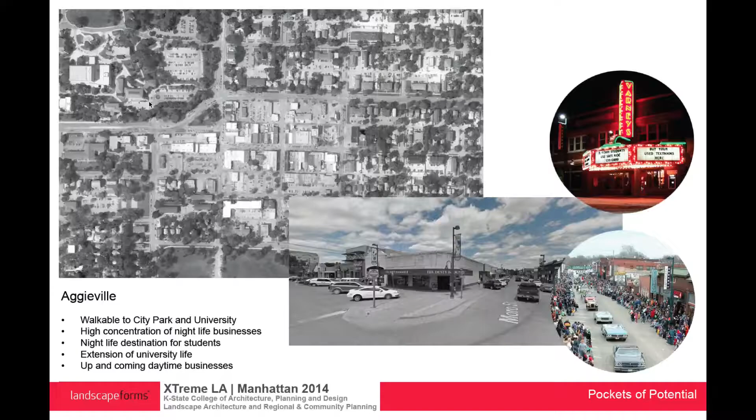So the next is Aggieville. It's a really, really walkable place. It's very close to the university. It has a high concentration of nightlife businesses, but we've also been making a move to make it more of a family-friendly environment. A couple weeks ago we had the Aggieville 125th celebrations, saw tons of families out there, and it was just a really great way to see the space activated, not just at night.

Like we said, there's a lot of up-and-coming daytime businesses. Varsity Donuts is a staple, of course, and Acme is wonderful for all sorts of things.

City Park. This is a huge amenity that I don't think we really capitalize on. It's 40 acres, and there's not too many other cities that have that big of a spot really close to downtown. And it's a very big connection point between what's happening down in Aggieville and what's happening on Poyntz. Perception-wise, they seem like they're really far away, but you can get from Aggieville to Poyntz in less than a mile. It's actually really quick.

So there's a varied use of recreation down there. You have the pool, the spray ground, the rose garden, a lot of things that are working really well, and then there's also some opportunities to improve those things. Right now it kind of has a low-profile, nondescript park edge. We really think that this is such a good amenity, and we'd like to see it programmed a little stronger.

And last, we're going to be talking about the gateway. So the entrance to the city coming off of 70 and then on to 177. Right now, when you're coming up that way, you hit the back edge of the mall and a big expansive parking lot, and that's really a big front for our city.

So there's a lot of things we could do with that. It really can bring in some gaps between making this a walkable downtown Manhattan center. Right now we kind of divert going down Poyntz, we go down Pierre, make the little circle drive, and then out onto Tuttle Creek. But it has really a lot of opportunity to give some character for that first perception that people are having of our town.

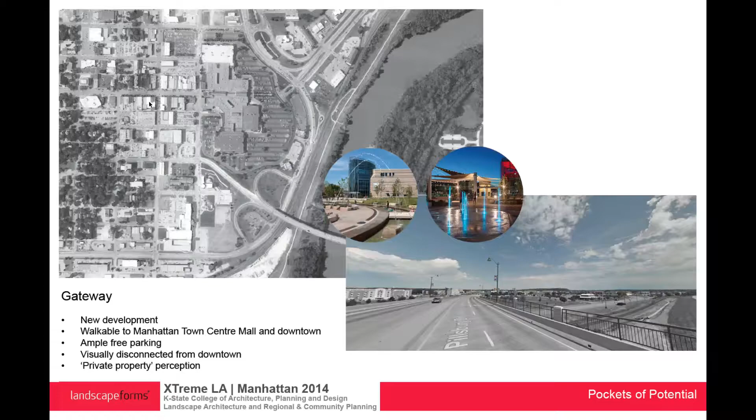The big box. We love it. We love to hate it. What we've seen is that there's an increasing vacancy. It is vehicle-oriented, it's difficult to access without a car, and it's low density and expansive.

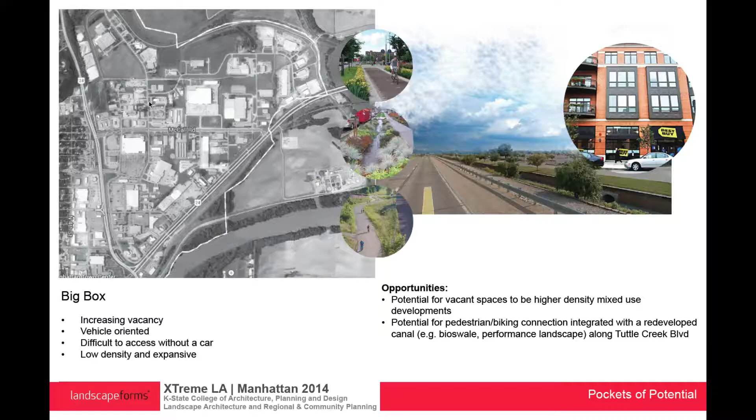Its potential is to imagine the vacant spaces as mixed-use development, to integrate it with your big box stores, but to also have residential, small businesses, big businesses, and also to integrate biking and pedestrian connections so that it is more accessible, and also integrated with sustainable landscape interventions to mitigate or help with stormwater management in this area.

The stadium, it is impressive. It has expansive surface events parking. It's an icon for Manhattanites. It's adjacent to the hospital, research facility, and university-owned apartments.

One of the opportunities that could be explored is the potential for additional uses during off-peak hours, such as a farmers market, or thinking of using sustainable materials to help with stormwater management in terms of the surfacing of the parking lots, such as permeable pavers, integrated bioswales, or reinforced turf.

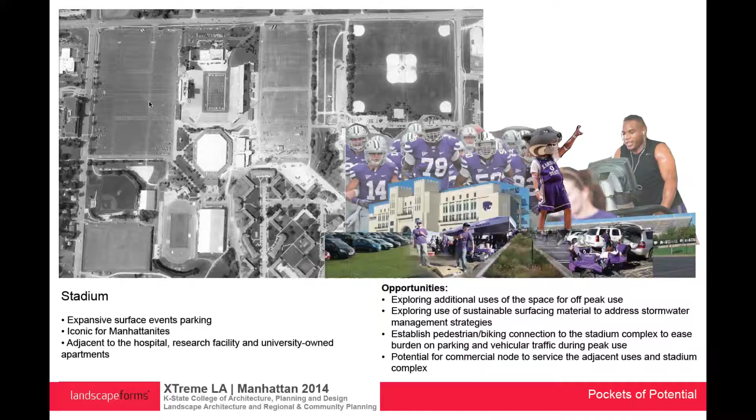Lastly, the research facility. It is a new development. It's projected future growth for Manhattan. It is a center for innovation, and think big, basically, is what we see it as.

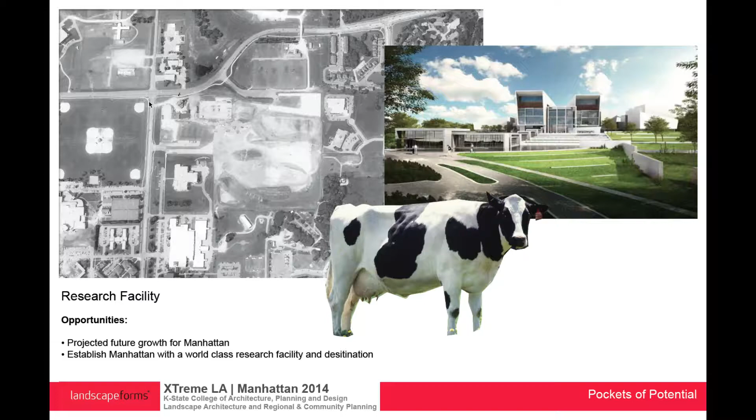And I'm going to introduce the next presenter, Cody, who will talk about connections and transportation.

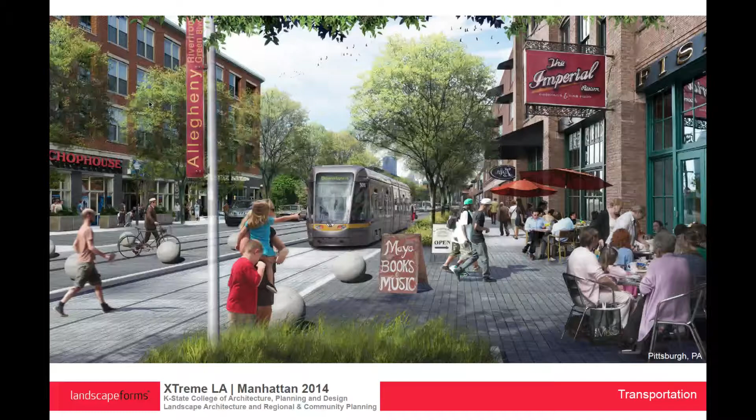The components of a street are actually pretty significant, and they're actually pretty, like the small details. One of the most important things is actually appropriately scaled architecture to the right-of-way width. So we want narrow travel lanes. We want transparency on our architectural storefronts.

We want people, bikes, and cars to be able to use that corridor equally. And we want a really wide sidewalk typically. We want 18 feet at a bare minimum. And it needs to support dining, walking, and furnishing, as well as the mentioned stormwater planters as well.

So the concepts that we're going to show you actually have been in place for a very long time, and they're still in place today, and they're still happening in cities all over the United States.

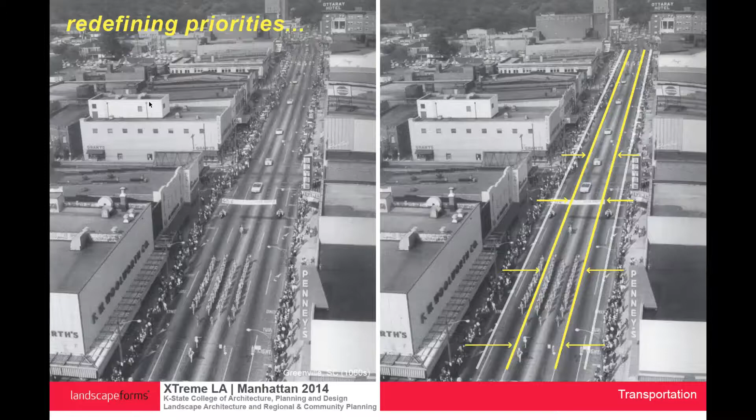Just to show you a couple of examples, this is Greenville, South Carolina, a very small town. In the 1960s, they actually decided to redefine the way that they were treating the street. They took a 6-lane road through their main street, road dieted it to 2 lanes, on-street parking, and street trees, and this was done by Lawrence Halprin in the late 60s, installed in the early 70s.

So as we jump into the specific streets, we did read through the 2035 Manhattan Transportation Plan. And what we pulled out of that is definitely that there's tons of opportunities and that things need to happen. And that's what we really want to focus on. It didn't really get into too much detail other than the fact that it needs to be multimodal and it needs to be a shared space, which we'll get to.

So what we're going to go with now is a series of diagrams to show the analysis that we went through in looking at the city. The first is really an exercise looking at proximity within the city of Manhattan.

The myriad of circles you see on the screen represent different walking distances within the city. The smaller red ones are a quarter mile, which is really just a 5-minute walk for the normal person. From there we have a larger half-mile ring, which would be 10 minutes, as well as up to a mile, which would be really a 20-minute walk.

You can see the majority of the metropolitan area of Manhattan is really within that 1-mile radius, which would be not much more than a half-hour to 45-minute walk from one side to the other, which, in the grand scheme of things, is not that large.

Also, behind this image you can see we have City Park called out in green, as well as some of the major arterial streets shown in white that are labeled. The other important factor we wanted to call out as we're looking at transportation is the linear trail and how it covers the southern expanse of the city, but really doesn't lead to or from any specific location.

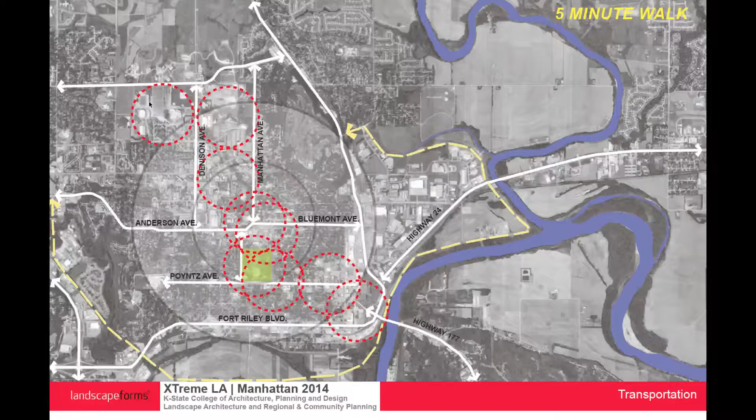This is hearkening back to the group before us looking at what they called pockets of possibility. We like that, so keep those in mind as we show you these connections we're looking at, and see how the proposition of these additional connections can really tie these things together, as right now they're slightly disjointed.

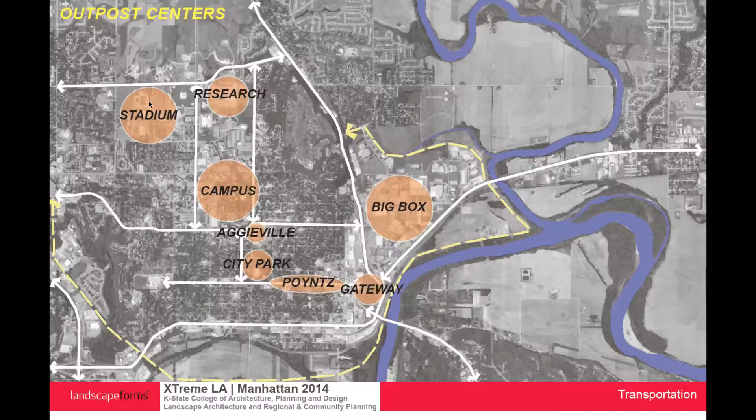These are the big entrances into the city. These are important, obviously, because they're bringing everyone here. They're bringing all of the people here, but they're also bringing the traffic here. The idea is really to look at how do we handle that volume, but also how do we celebrate that entrance. All of these are important places to see the city from, and how can we really address that.

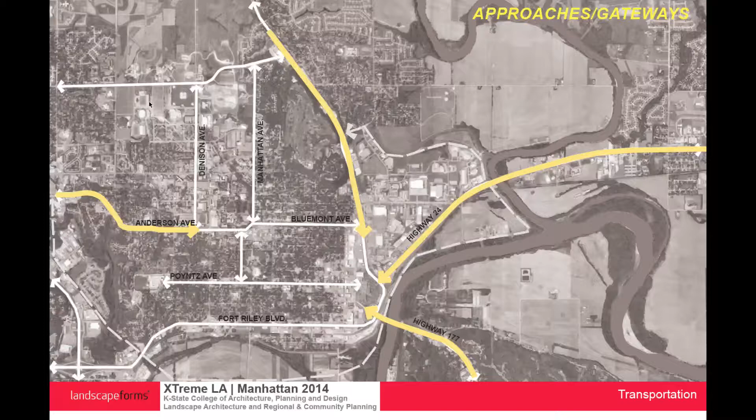And then we get to what we saw as the barriers. Some of these are physical barriers, obviously crossing the river when you're coming in on 177. You have the levee wall, you have the train tracks, you're kind of landing. There's a lot of circulation you have to go through to get really anywhere in the city.

That's a physical barrier, but there's also quite a few perceived barriers. Looking all around the K-State campus, Manhattan and Denison really don't have a huge pedestrian volume that they can accommodate. A lot of streets dead end into those streets, and they don't have a lot of bicycle occupancy because they don't have the amenities to account for that.

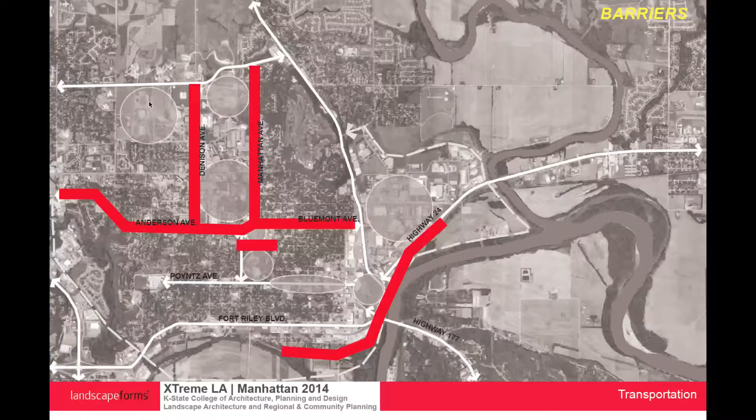Also, of course, Bluemont and Anderson, a huge arterial street right through the middle of town, not too fun to cross, as we found out this week. The other small one that I think is very important is this perceived barrier between Aggieville and City Park, which I think Rachel touched on. They're really not that far away, but it feels like they're a completely different area.

So we're going to apply some of the images and concepts we've talked about so far to some of your existing conditions. These are by no means prescriptive. You don't have to build it this way, but this is just a reimagining of some of the sites we saw this week.

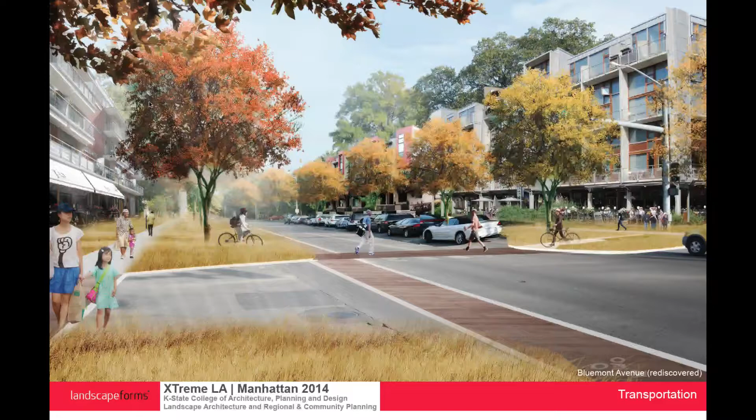So this is Bluemont Avenue, obviously that huge arterial through downtown. It's 4 lanes, there's no parking on either side, it's pretty intimidating to cross. So looking ahead, this is something that it could be. You can see we're narrowing traffic lanes, we're allowing for parking, but we're expanding sidewalks to allow for cafes or other street uses to expand out onto the right-of-way.

We're incorporating tall grass prairie species that can really convey the meaning of Manhattan and why we're here, and the beauty of this, but also potentially handle stormwater needs as well.

Looking at the connections, we'd love to look at every single street in the town, but where we really saw the largest importance were these larger bold arrows in green here, the same streets that we showed as barriers before, bounding the University, Bluemont and Anderson.

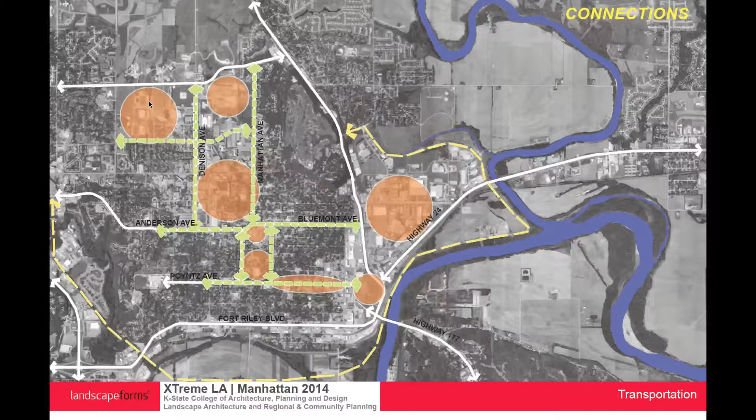Now, we know that a bus line was something that was looked through in the recent past, but just as outsiders coming into the city and seeing how people get to one place from another, and having in-depth conversations with students about getting to the stadium on game day and the struggles with that, especially with driving, we did see a really simple loop that remarkably falls on the same loop we took on our tour, because it seems to hit a lot of the high points in the city.

And it goes down all of the major avenues where almost all of the commerce is, and it's hitting all of those shopping centers, all of those parks, and all of the places that people want to go, and it's a very simple loop system.

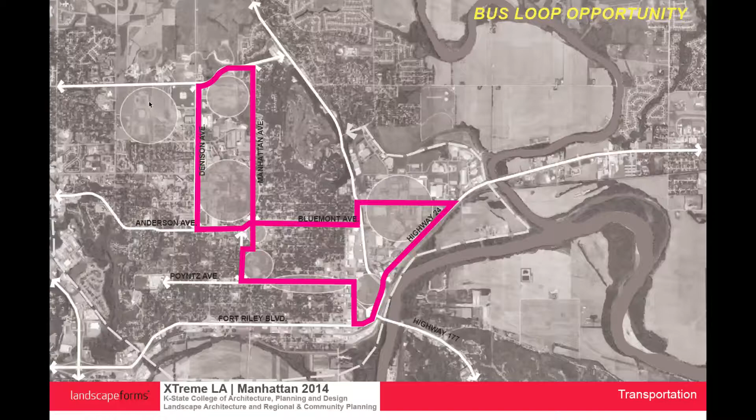And then looking at recreation, obviously not everyone wants to ride a bike on a street, not everyone wants to walk down a sidewalk, but you have a great system in place with the linear trail. But how can that extend up to the north side and really make a comprehensive loop through the city? And then how can we have spurs off of that trail that lead you into key points within the city and connect you to those street systems that are addressing bicycles as well?

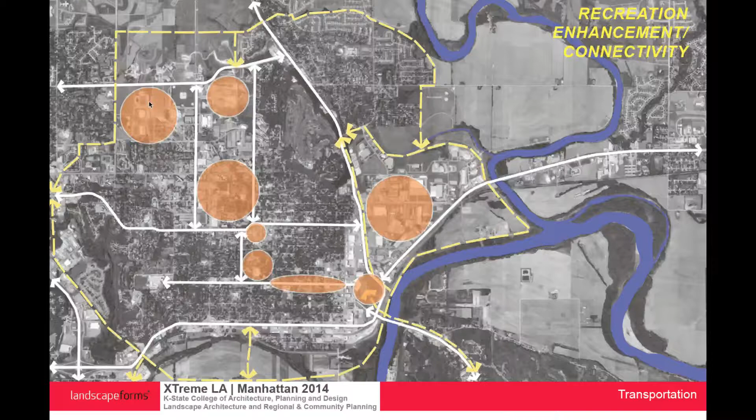And so what we really want you guys to understand, that we've come to understand, is that this has been a 24-hour process. This is by no means comprehensive. This is by no means all-inclusive of what Manhattan is facing for the future and what needs to happen. But we do want to leave you with some recommendations.

One of those recommendations, first and foremost, is that we think we need to take an inventory of all the streets in town. We need to develop a comprehensive master plan, which we can bring in experts in walkability, experts in bicycle infrastructure, and experts from all over the country that can take a look at our streets at a different level and from a different light than we understand them now, to really understand how they can become more multimodal, how they can convey the stormwater and all these different things that we've talked about.

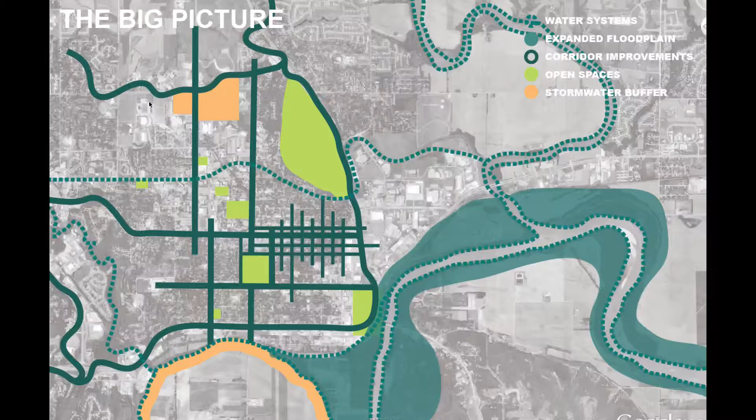Can you do an overlay on the next one? So how these overlay with our key areas: the campus, Aggieville, downtown, the hotel district, and also very important is the river. So integrating these principles into existing open spaces, such as City Park, but also developing new key open spaces that Aubrey will talk about, prioritizing main streets for streetscape improvements. We saw quite a bit of this with the transportation group's images, and you'll see more with us, supporting public and private projects, and also buffering the river, making that not just a place that is more environmentally valuable, but also valuable for people.

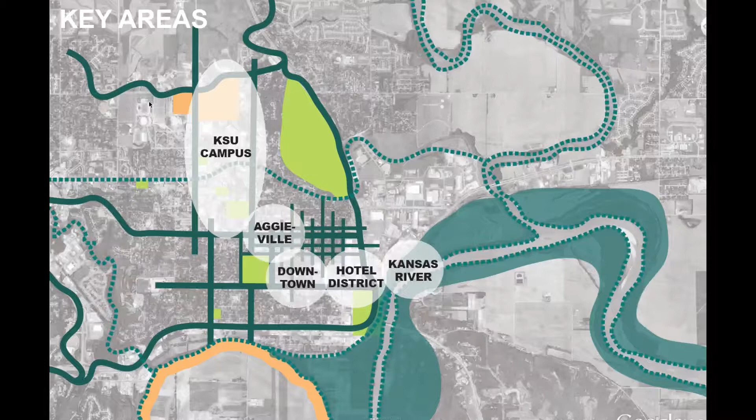So we've been imagining two big strategies or ideas for how this might really change the place and change the experience of Manhattan. I think there are two really great opportunities here. There's the need for connections. We've been talking a lot about how these great special places are in the city, but that nobody walks between them, that it's not really set up for that.

So what if this was a conduit for water and for bicycles and for people, connecting these places so important to the town, but also bringing in more of the Flint Hills, more of the phenomenal nature of the seasons, of wildlife, of the fluctuation of students passing by during the school year, and then the time when it quiets down and everybody goes home.

We can imagine that as there's increasing density, maybe these houses become more attractive to families, and then you could build in between the houses. So you add a little more density into the existing fabric, but maintain that really small town, lovely feel.

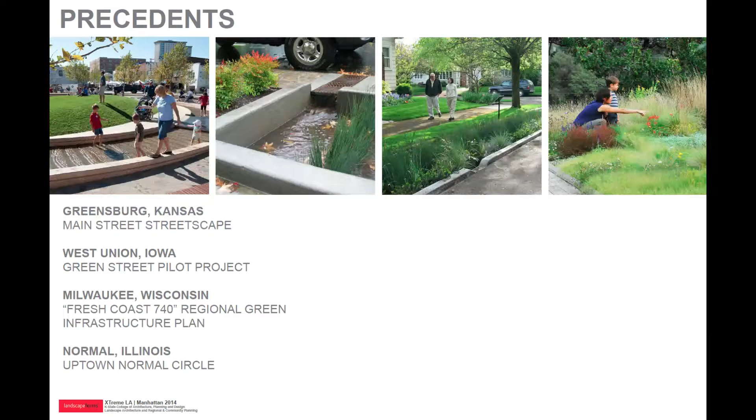So we see implementing stormwater practices in Manhattan as an opportunity to grow within the current footprint of the core, to attract new residents into this area and engage the current residents within the core as a way to limit sprawl as the city continues to grow. We see it as an opportunity to foster health and well-being and contribute to a better quality of life. So the focus here is growing Manhattan sustainably.

Thank you. The next group will be talking about growth.

Hello everyone, our group's going to talk about growth and some ideas and strategies on how to deal with growth. My name is Matt Lazier, I'm a landscape architect with MKSK out of Columbus, Ohio. Hi, I'm Meredith Epley McWilliams from Gensler in Houston. And my name is Timothy C, I'm a fifth-year architecture student here at K-State. So together we're here to look at growth.

In the next few decades, Manhattan is going to grow, but we shouldn't be scared of the growth. We encourage growth and we want to grow. But we want to be able to ensure that we control this growth in Manhattan by avoiding sprawl and avoiding the uncontrolled density. Can you go back?

By 2035, a statistic has shown that there will be around 20,000 new residents here in Manhattan. They will be coming from the National Bio and Agro Defense Facility that will be built north of campus and operational by 2020, Kansas State University as we head towards the K-State 2025 vision, and Fort Riley. Along with these new residents, there will be an estimated 10,000 new housing units needed to supply for these new residents here in Manhattan.

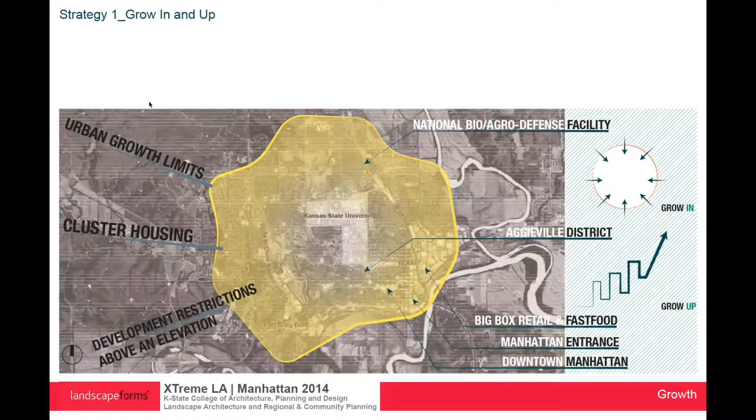And the last one is to think about some kind of urban growth limit. There are policy applications of that, there are practical applications of that. A really great example is Lexington, Kentucky, where they have horse farms. Horse farms are a really important cultural amenity, economic amenity, and they really wanted to protect and preserve those because they're an important part of the economy. So that's an idea on how to protect the Flint Hills because that's an important part of this economy and culture.

So the second strategy we want to touch on is providing for diversity. We know that we have this growing population to accommodate, and we know that there's not a one-size-fits-all answer to meeting this need because this population is very diverse. We have students, young professionals, families, and increasingly an active retiree population here. So we need to provide a range of housing sizes, types, densities, and also price points.

Now, one strategy that we do think is applicable to all of these different housing types is integration, integrating the new development into what already exists. And we want to advocate for mixed-use development, as we've already talked about a little bit. What we're showing here is an illustration of how you might increase the housing density in Aggieville along Moro Street, where there's currently a surface parking lot. And what we're proposing is building vertically so we can maintain the street life at the ground level.

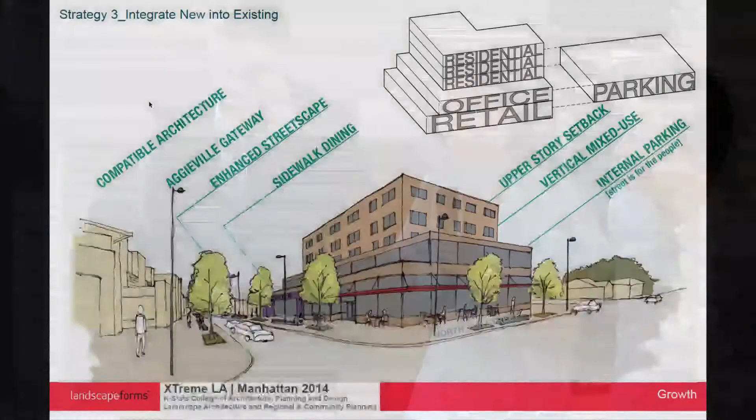We're showing a second level of office space that serves as a buffer between the nightlife and upper residential units. And by setting back the upper stories of this taller growth, you still maintain the existing scale and nature of this great place that already exists here in Manhattan.

All right, and our fourth strategy is to fill the gaps. So we'd already heard about centers and corridors. And what we're suggesting here is to really focus on the gaps between those centers for potential development. And you kind of solve two problems at once: you solve the issue of the gaps themselves, which is an urban design problem, but you also start to work towards solving the housing issue of 10,000 units that you need.

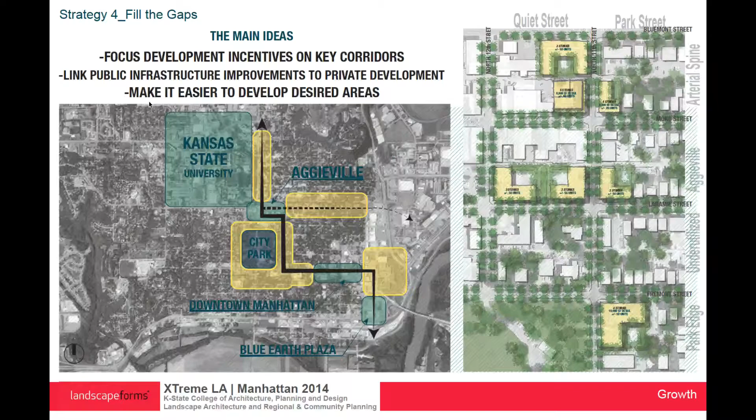So that's it for us. The next group, we're going to shift gears a little bit and transition to a more site-specific scale. First up is Aggieville and Poyntz Avenue.

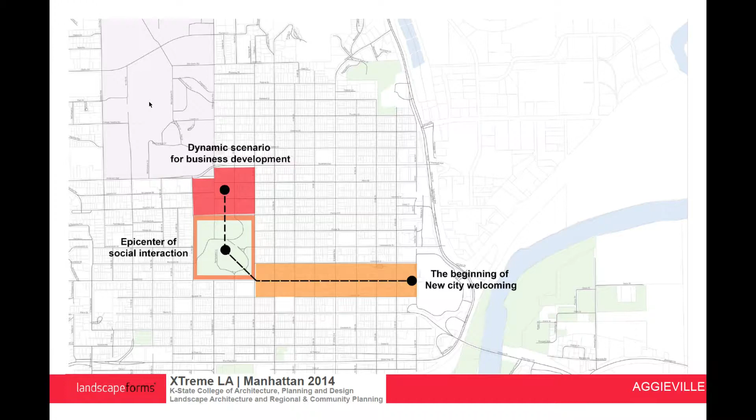These are some of the things we really wanted to hit on: greening our streets, incorporating artful stormwater management, activating our streetscapes, enhancing the pedestrian experience, improving pedestrian safety, and really creating a bike-friendly atmosphere. Like they said before, in Manhattan you can get almost anywhere within a mile, and what better way to experience such a great place than either by foot or by bike?

So we took what we learned from the precedent study from successful projects around the nation and tried to apply it to what we felt was the heart of Manhattan here, starting up at K-State University, the campus, through Aggieville, down to City Park, which we'll look at design for right after this presentation, and then down Poyntz Avenue into the downtown area, where we end up at the Gateway, which another group has looked at as well.

So if we begin up at K-State, one of the big moves we made to connect Aggieville with K-State was to try and provide a nice park atmosphere and a safe, beautiful crossing in that area.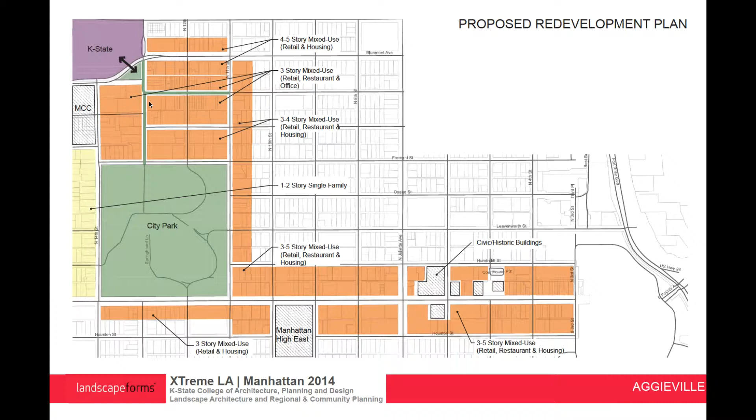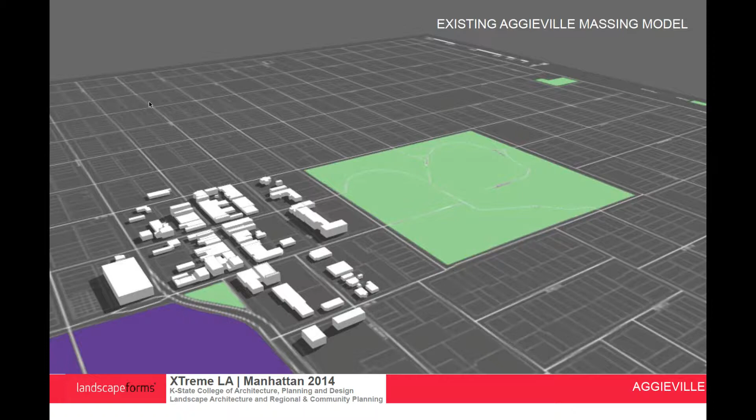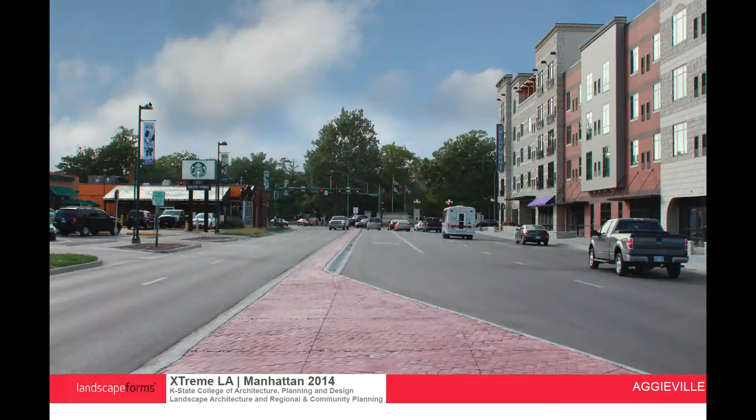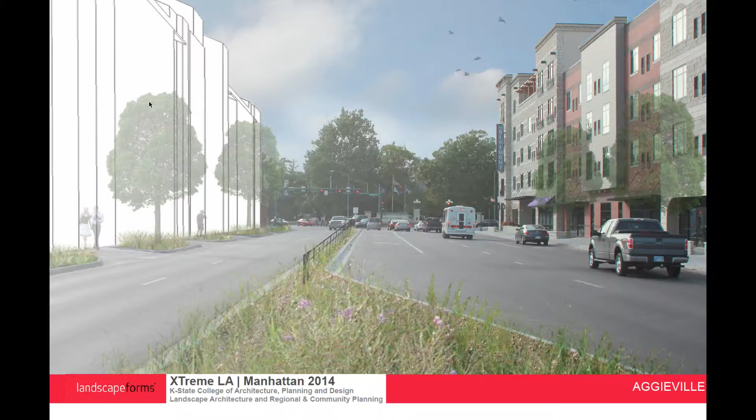And then looking at Bluemont Avenue here, this is what it is right now - concrete, we have one new hotel there, 6 stories, 5 stories. And if we add some of that density, this is what it could look like here. Add some trees, some nice median planting that starts to mimic and create a gateway into K-State and Aggieville.

And then Moro Street here, this is a typical section, the existing section. We have angle parking, parallel parking, and one lane down the middle.

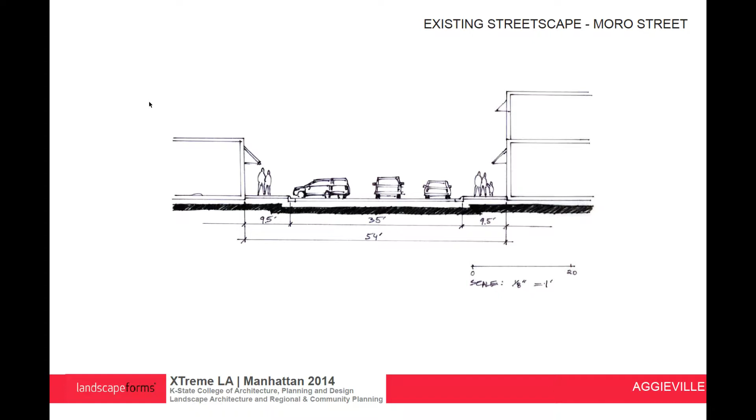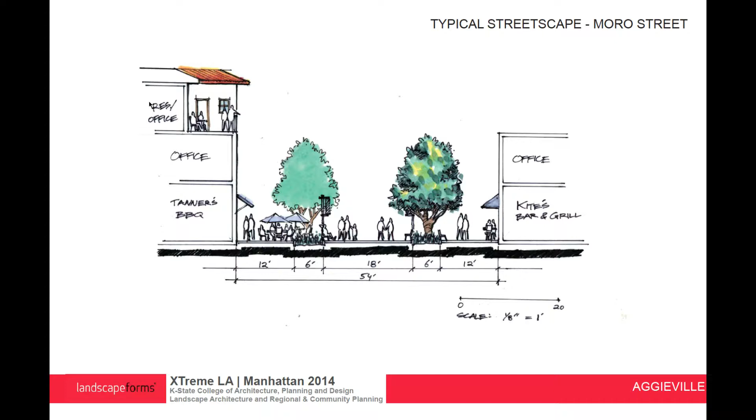So this is what that could look like. This is the existing Moro Street, and with more density and trees and pedestrian life.

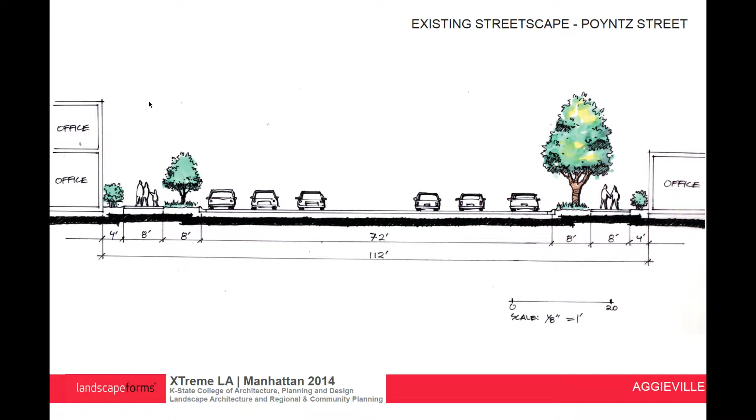And we looked at Poyntz Avenue here. Right now, very wide street, very small pedestrian access along there, short buildings. And if we add some of that density and life that the transportation group looked at, this is what Poyntz Avenue could look like with 4 stories, 5 stories, roof decks, residential mixed-use buildings.

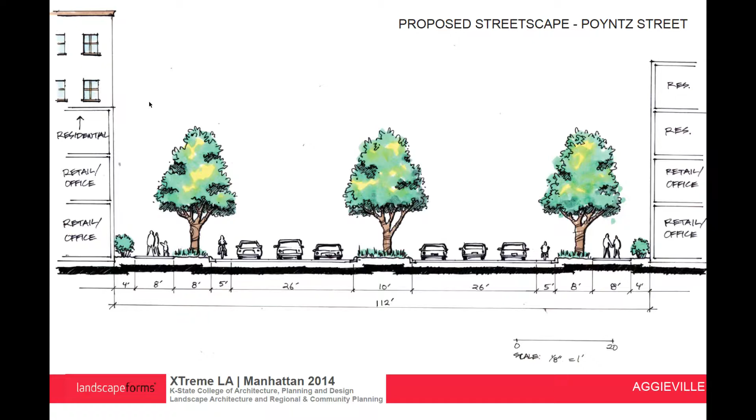So we'll look at City Park next. Thank you.

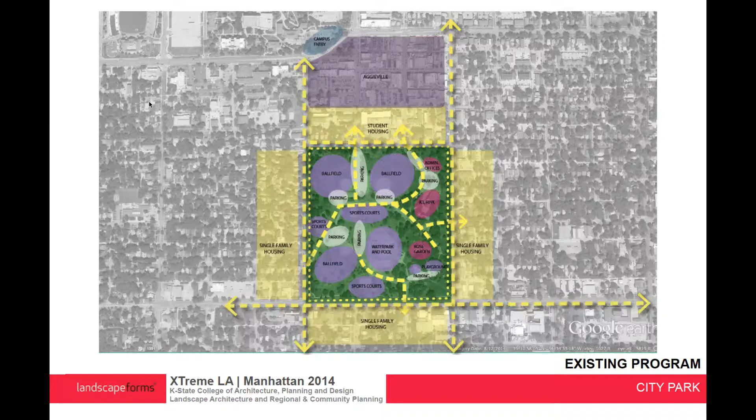When the park originally started, and this is the same for all parks across the nation, they start simple with a purpose and a very core idea. But as time goes along and differing needs and desires develop within the community, they're sort of tacked on. We see here it's become this disjointed, inefficient collection of spaces. So in our proposal, we really want to bring it back down to the core simplicity of what a space could be through multiple, flexible uses. We've illustrated that multiple-use core as a strong value of community, and around the peripheral, the more programmatic needs and the gateways into that area.

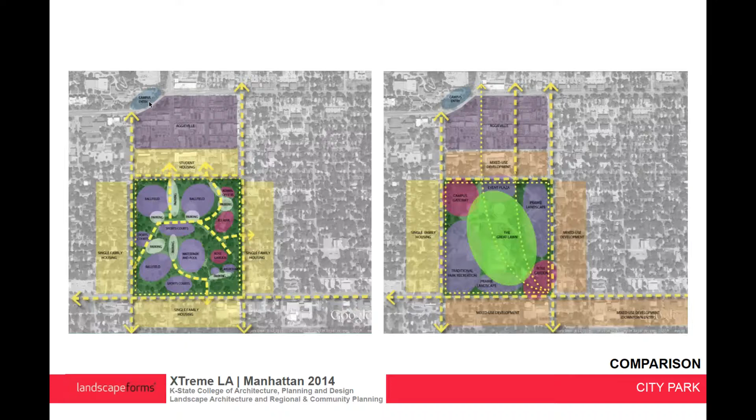If we take a closer look at the image on the right, this is the same one, just a little bit bigger. The first thing that probably jumps out is there's a giant bright green circle right in the middle of the park, which we've labeled the Great Lawn. We think that would be a really special place, maybe removing some of the structured programming from the park to create a space that can accommodate a lot of different needs and users, citizens, all kinds of activities from large to small scale.

The purple, or blue-purple, around the outside represents the more structured programming, which we've pushed to the outside. So as you go around the park you'll see that stuff going on, and also see through to the open space in the middle. Another thing we noticed is there are a couple of big pedestrian nodes in the existing park, shown in the pinkish purple fuchsia color. We call those the gateways: a campus gateway and a gateway towards the downtown area.

One other thing to point out on this map is we did remove all of the vehicular circulation and parking from within the park. We want to make that all pedestrian space.

So the smaller dotted line represents pedestrian connectivity—walking, cycling, skating, rollerblading, all those kinds of uses. And then all that other vehicular circulation we push to the outside of the park.

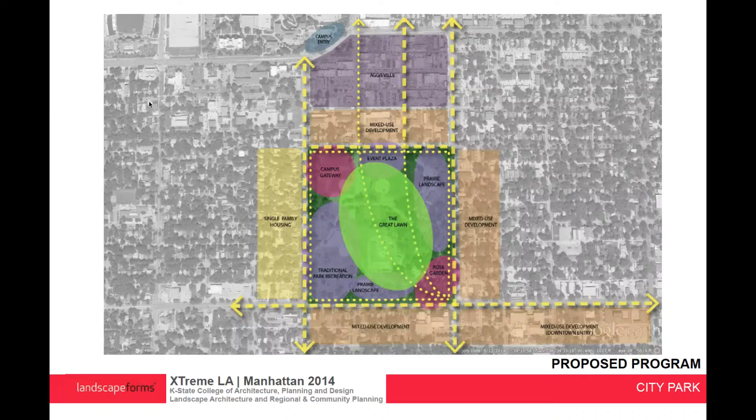So let's take a look at the reimagined plan. Throughout this entire presentation, we've really been emphasizing this idea of connection, community, et cetera. In order to connect these three differing areas, we've got the core, the Aggieville District, and Poyntz and downtown. So in order to connect those, we've emphasized this great lawn by consolidating these disjointed, smaller spaces into one large communal area, which leads to the proposed event plaza.

We want a space that is entirely flexible, open to all sorts of needs—Purple Power Play on Poyntz, farmers markets. There's a huge opportunity to integrate the community further into the core. Our programmatic needs reach around the peripheral, and these fingers that come in are continuations of the current city grid, such that the surrounding adjacent neighborhoods flow seamlessly into it, rather than this item being placed on top. Additionally, there are structural areas within the park that can be leased to local businesses, vendors, or perhaps the city as deemed necessary.

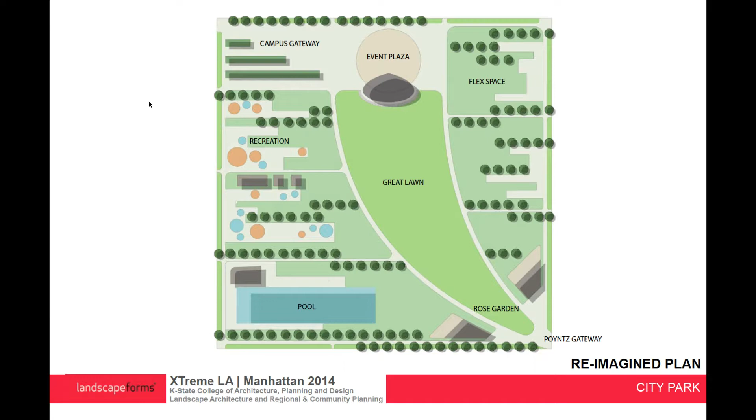So we had this general concept of continuing the Flint Hills into Manhattan. One of the big ideas for the gateway into the city is building a giant artificial hill that looks like you're going through just another hill in the Flint Hills, entering one of those ravines, seeing those lovely valley views off to the right and left, like when you're on 177 and I-70, diagrammed in this area.

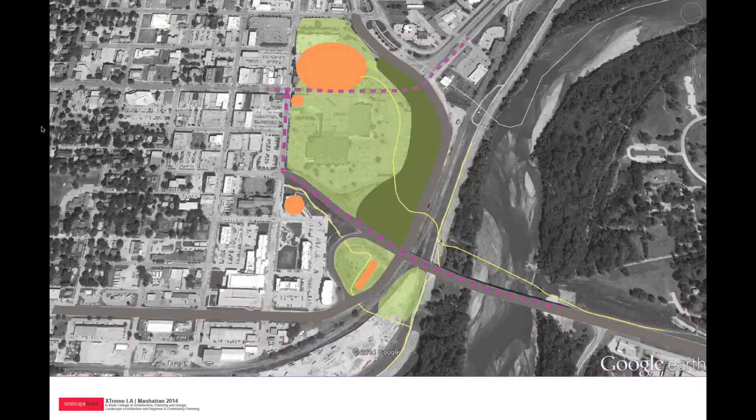Going through one of those big hills as you enter the city, it's just another valley in the Flint Hills—there just happens to be a bunch of people living in the area. We're expanding these green areas to incorporate native prairie plants that are so prominent in the region, what make our area diverse and special. Incorporating commercial development up here in these oranges, removing the mall but getting a better use of the space—much smaller, compact, but still as much commercial development and tax base, connecting it with Poyntz, a main area of the city we want to develop further and utilize better, connecting it with the commercial.

Promoting the Flint Hills Discovery Center, which we just spent a ton of money developing, bringing more people into the area so they can study the prairie and learn more about the region we live in and what makes it so special.

A linear trail connects into the city, shown in yellow—potential bike and pedestrian trails, with an elevated bridge to bring you across the river so you get that glorious vista as you come around, families riding their bikes on a Saturday afternoon, seeing the river and the parks you can go to instead of having to drive and park.

Using the old train depot station as a trailhead for the linear trail, connecting it back into the city so you can start utilizing the space we already have and develop things we've already started, but making them better.

And I'm out of excused time for Spanish, so I've got to be really rude and leave, sorry.

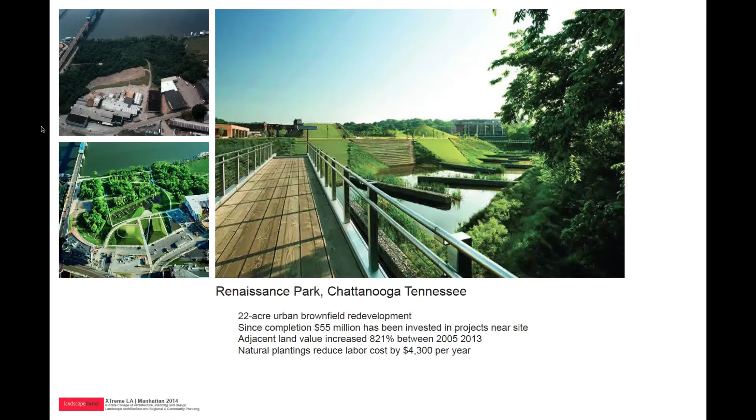The world is becoming more global by the day. We're more digitally connected all the time, and Manhattan is more nationally and internationally known than ever before. But what does that mean here for everyday life? What do we really need to live where we live? For us, we really believe this means connecting to the Flint Hills in a tactile, personal sense on a daily basis.

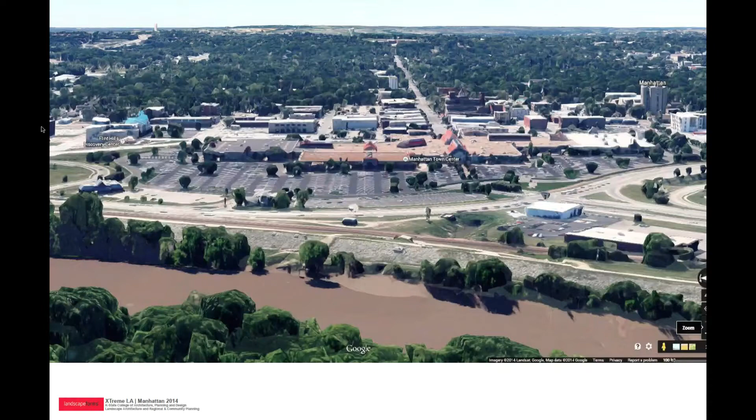What we really envision is a sea change in the face of Manhattan. The first thing people see as they drive in the morning, a new way for people to actually interact with the river's edge, the way the infrastructure and stormwater group was talking about peeling back that levee, and really adding value to this space along the river, bringing the really special things about living here into our daily lives.

Here you can see there's new development at the end of Poyntz that's now creating a gateway, mediating between the urban and the natural beyond. And this is a pedestrian bridge that connects across onto Konza Prairie and then all the way onto the linear trail around the city.

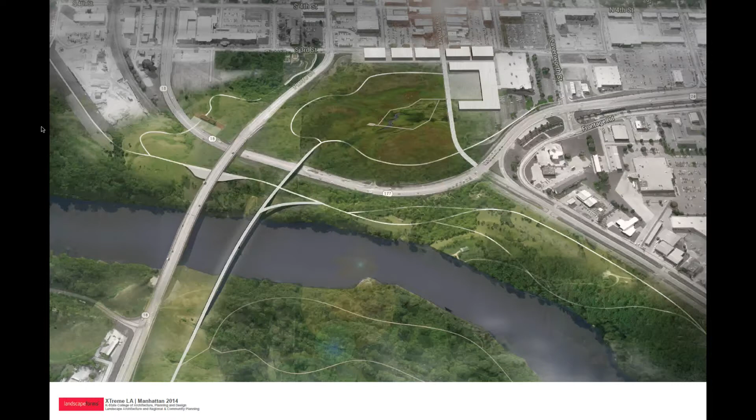This basically shows why we think this site is important. It's also a gateway into the city, but it emphasizes the importance of Poyntz Avenue and how all of this space directly next to the river can really be utilized to help manage the stormwater and create a more unique experience for the area.

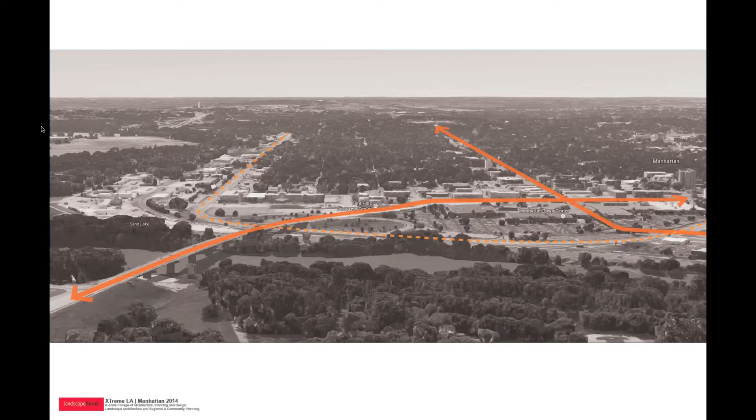We just want to thank you all for being here, and we'll end off with a recap of all the big images. Thank you.

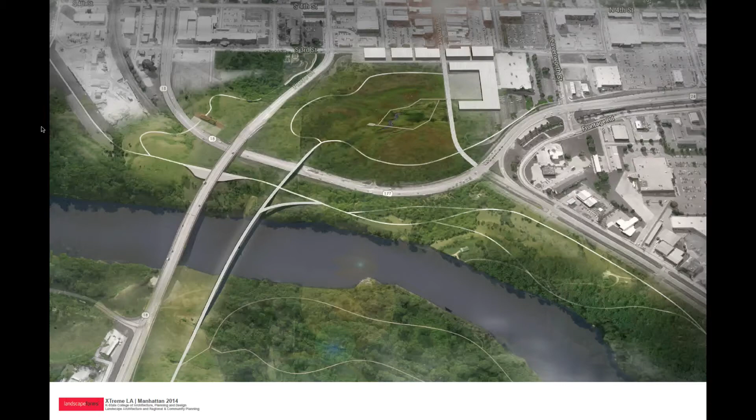Stephanie, Barbara. I don't think there's anything else to say.